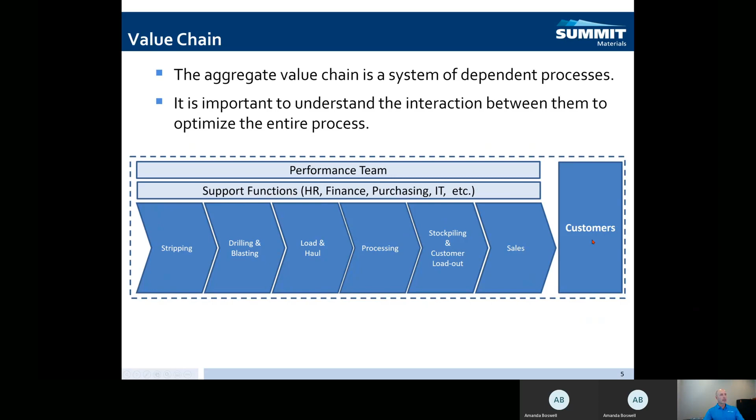Let's talk about a little bit of aggregate trivia. How many tons of crushed stone are produced annually in the U.S.? If you have a pen and paper, I'll give you a couple of seconds to write down your answer, and let's see how close you can get.

There's a little over 1.3 billion tons of crushed stone produced in the U.S. for construction purposes.

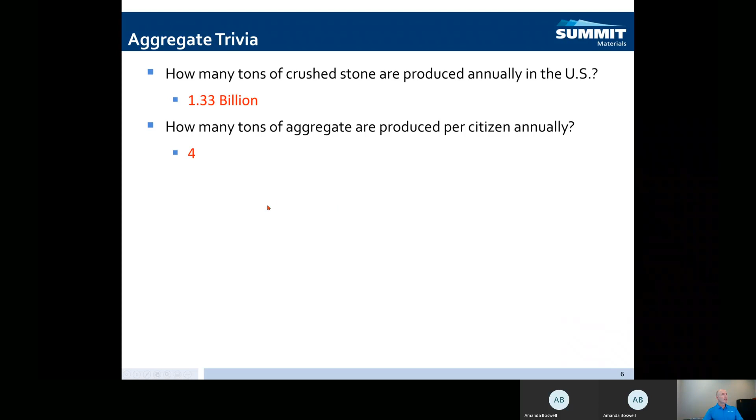How many tons of aggregates are produced per citizen annually? About 4 tons per person every year gets used for roads, houses, sidewalks, and all the things you can think of that aggregate gets used in.

How many tons of aggregates are used per mile of two-lane highway? About 25,000 tons, or about 1,250 truckloads. So when you're driving around and think about all the miles you drive, think about just how much aggregate we really use.

How many tons of aggregate are used to construct the average home? 300. Hopefully you got close on those, but that should give you a little perspective on how important aggregates are to our daily lives.

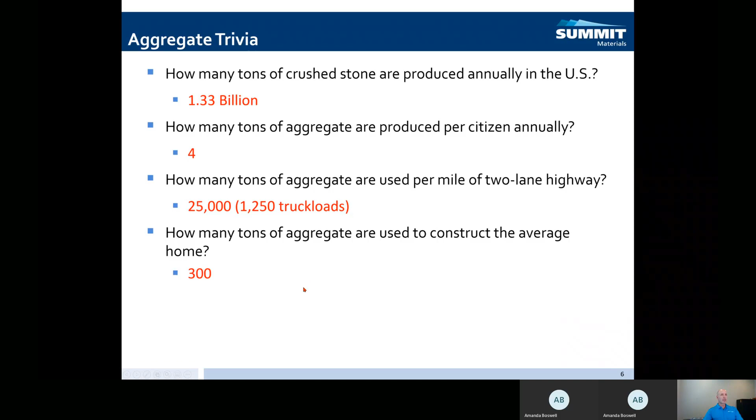Let's move into the aggregate deposits. That's really where everything starts. We want to have good material that we can mine, material we know will produce quality products for our customers.

The definition of a construction aggregate: it's a broad category of coarse to medium grain particulate material used in construction. We call these sand, gravel, crushed stone, or recycled concrete. Those are the major categories.

Aggregates are the most mined materials in the world. There are different types of deposits or geology that we use, but the three main categories are limestone, granite, and sand and gravel. In the industry, we talk about quarries and sand and gravel deposits. Quarries are really just hard rock deposits that have to be blasted.

Sand and gravel, or the technical word for that is alluvial, are areas where material has been deposited. In quarries we have to blast it, but in sand and gravel we will excavate it, which we call dry mining, with an excavator and trucks, or we'll dredge it, and we'll show you a dredge in a little while.

If you think about this piece of pie, the different categories, limestone is the most predominant at 70%, granite's about 13%, and then we've got some smaller types of deposits down here.

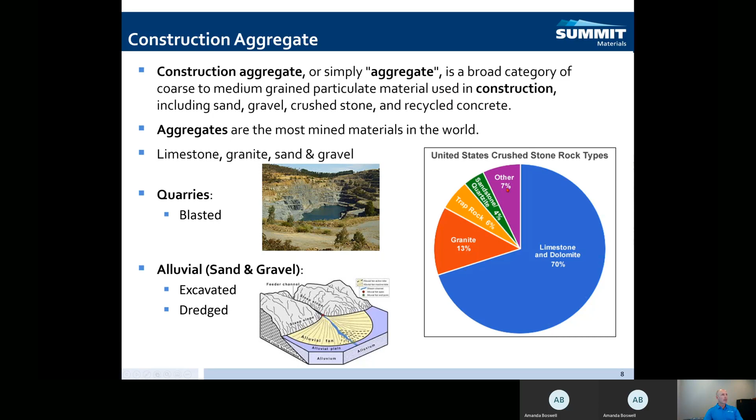All right, let's talk about sand and gravel. Again, they're alluvial deposits, old riverbeds, floodplains, and coastal plain. The main distinction is that these deposits generally do not need to be blasted, and we just dig material straight out of the ground. It's more loose in nature.

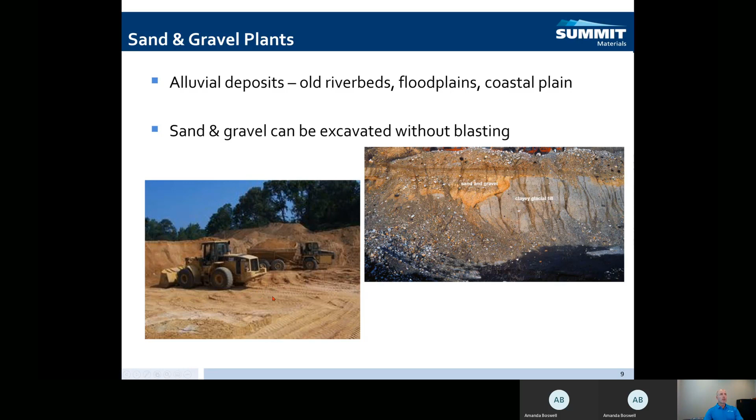The next category for quarries is limestone, which is calcium carbonate. It's a hard sedimentary rock, and it's the most common, as we saw on the pie chart. It can also be mined for chemical properties, but that's not something that Summit does.

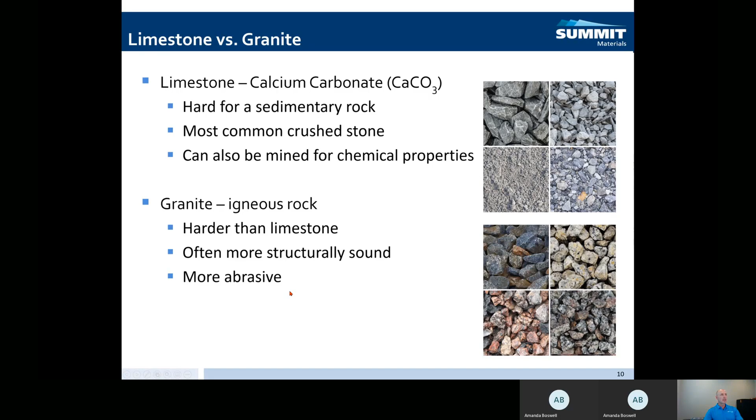Granite is another common type. It's an igneous rock, generally harder, often more structurally sound, and more abrasive. That's a big thing for us in our industry. Granite is very hard on steel, it wears through a lot of steel, so it's a higher cost material to produce.

Let's take a look at where we might find some of these different types of deposits in the United States. This might be a little tough to read, but as you can see, limestone are the pink areas, very heavy in the Midwest, Texas, Florida, and a little bit out in the West. Granite you can see in the mountainous zones, very predominant in the Appalachian Mountains in the Northeast and some out in the West. Trap rock doesn't have a lot of mines, they're very expensive to produce, and there aren't a lot of big cities in trap rock areas, but there is some of that type of mining.

The other big one is sand and gravel, shown in the yellow areas. As you might expect, we see the yellow sand and gravel along the rivers and around the mountains, where material has been deposited through erosion.

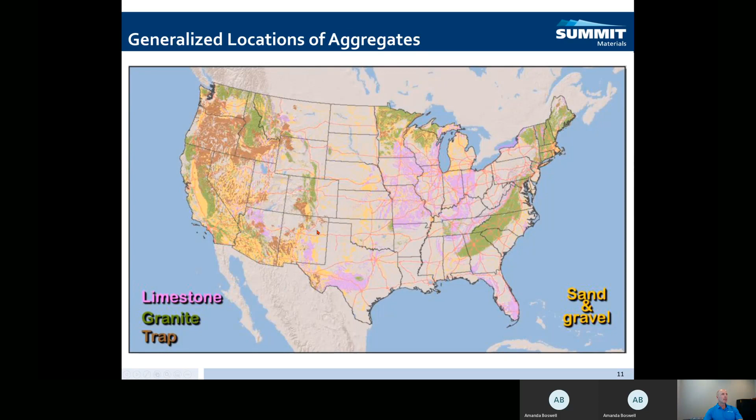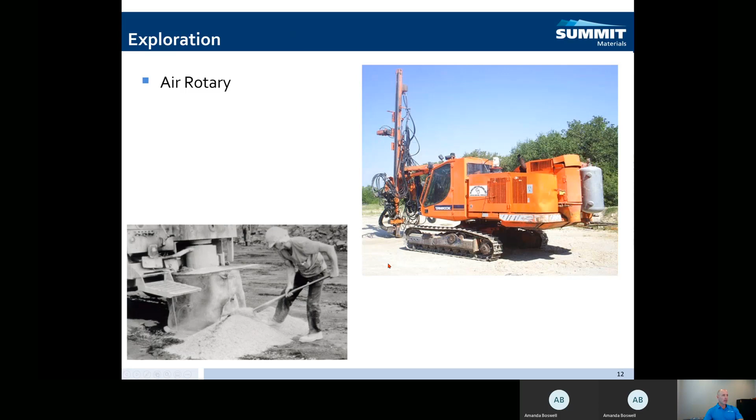So how do we find these deposits? Through a process we call exploration. One type of drill is what we call air rotary. This doesn't give us a lot of detail about what's in the ground, it basically just gives us depths. So a lot of times we'll use this cheaper drilling method to go through the soil and weathered rock to find the top of the hard rock we're looking for.

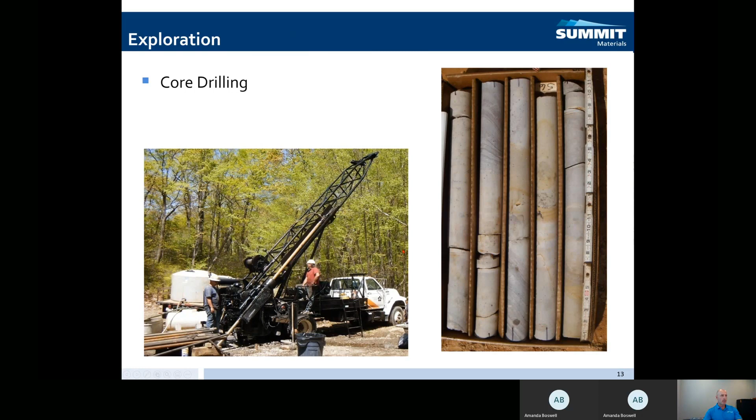The next most common is core drilling. This is a different type where there's a tube with a diamond bit on the head, and it will drill down into the ground and pull out these 2-inch columns that are placed in boxes, so we can really study what's down in the ground. It's a much more expensive way to drill and explore.

Another type for softer ground is auger drilling. Again, it doesn't really give you a lot of detail on what's in the ground. It's mainly just there to tell you the depths of the different types of material.

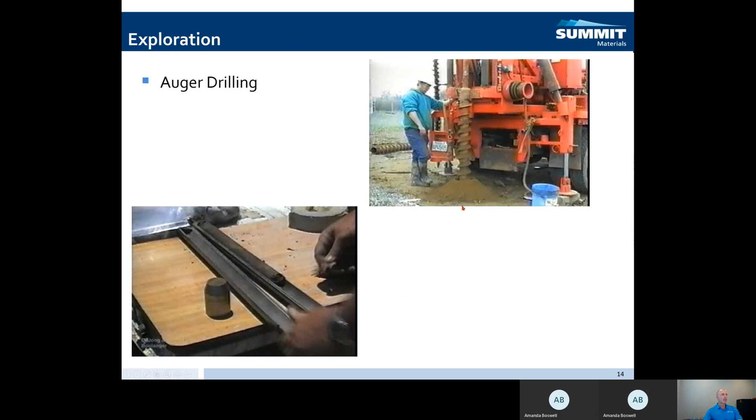Another interesting type of drilling is sonic drilling. This is for loose sand and gravel deposits, and it uses an ultrasonic vibration that allows a tube to be pushed down into the ground, and then the material is pulled back up intact, so we can get a lot more detail about what's in the ground, and it doesn't mix the material together.

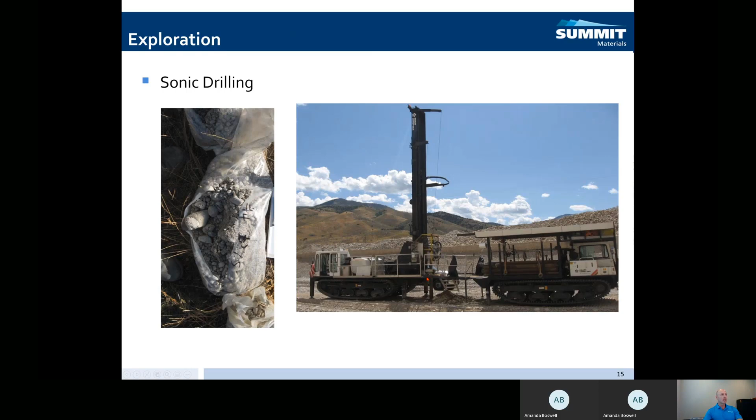Another type that's not real common but used sometimes is called geophysics resistivity. It's a process of placing electrodes in the ground and checking the electrical resistivity of the different types of materials. It doesn't give us a lot of precision, but since drilling is really expensive, this is a way to check for any big anomalies that might have been missed, and then we might want to go back and put another hole based on what we find with this electrical resistivity.

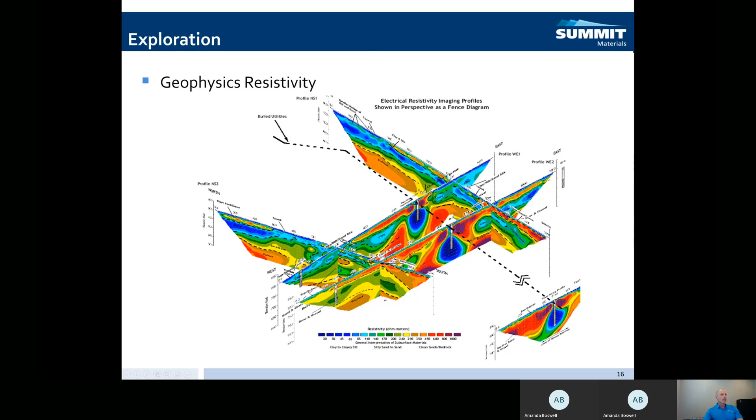Another thing to look for in quarries are ponds. We have ponds that collect water that we use to wash the stone, and we need ponds to collect the water that has fines in it that needs to settle out before we can reuse or discharge that water.

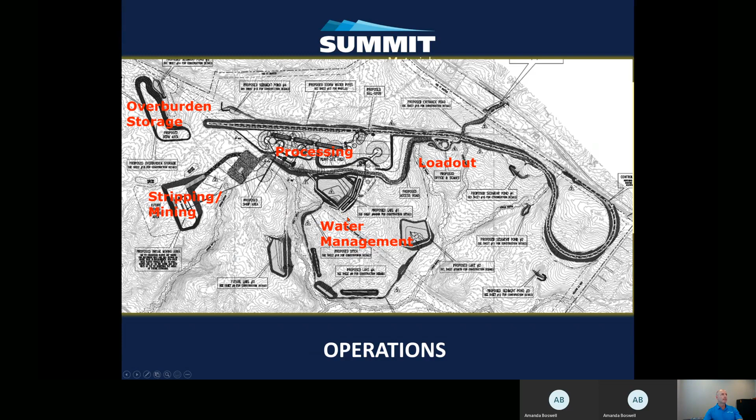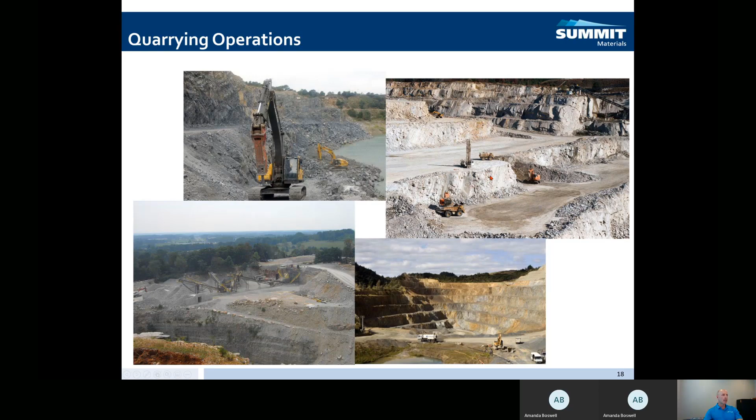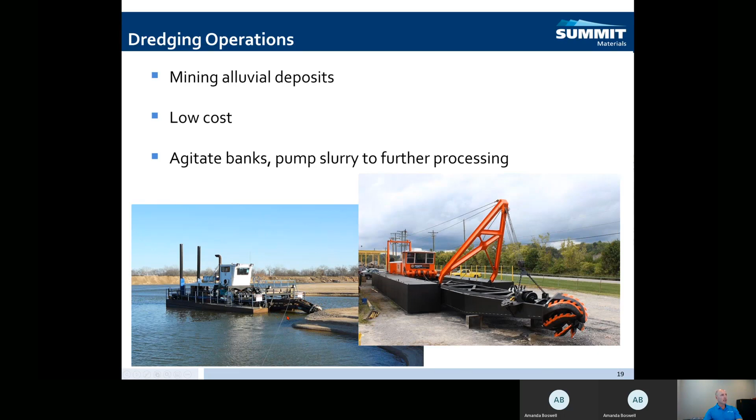Sorry, let me stop this for a second. We've got a little video here that kind of shows you how a dredge will work.

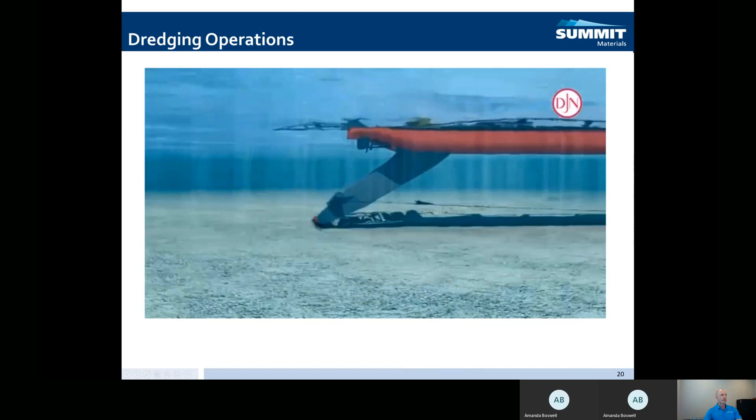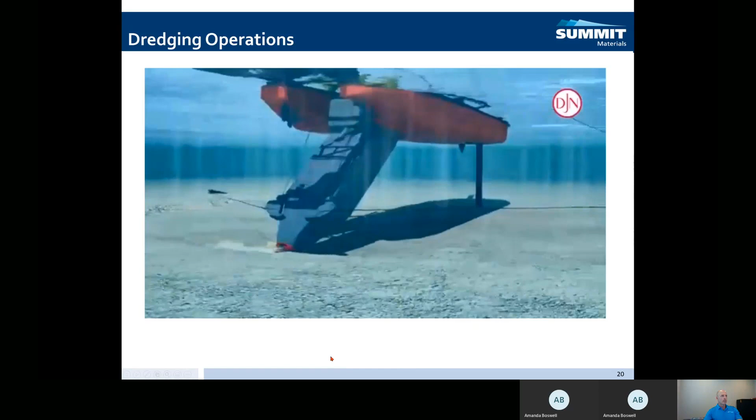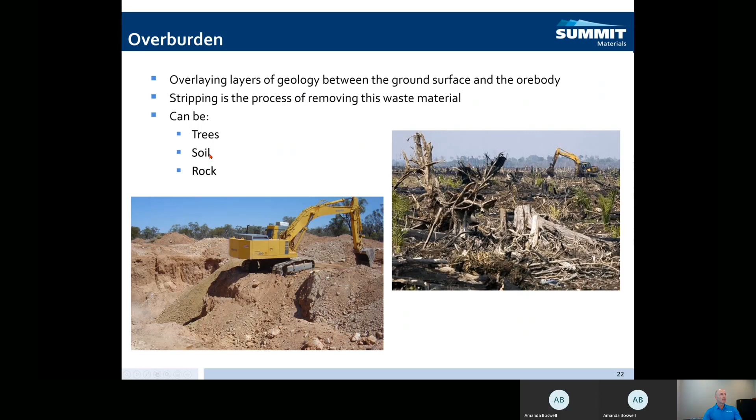So now talking about quarries, like we talked about before, the first step is stripping. Some photos here. Really what we're doing is just taking off the overlying layers of geology between the ground surface and the ore body. The materials that are moved are the trees, the soil, and the rock.

The next step, as we talked about, is drilling and blasting. So the holes are drilled in a set pattern based on the characteristics of the geology and the desired fragmentation. Something that is not obvious is that it's extremely important that these holes are the right diameter, they're put in the right place, and they're drilled at the right angle.

If you think about the amount of explosives relative to the size of stone that's being blasted, it's really small. This hole might be 5 inches in diameter, and the block of stone that it's blasting might be 12 foot by 12 foot. So you think about a 5-inch column that's got to blast a column of rock that's the size of your bedroom, that's 50 feet tall.

If we don't get that explosive in the right place, we're going to get a lot of boulders and things that we don't want, that we can't send to the processing plant. So each one of these holes are hopefully put in the right place, and then explosives are put into those, and we'll get nice fragmentation. We'll talk about this a little bit more in the next coming slides.

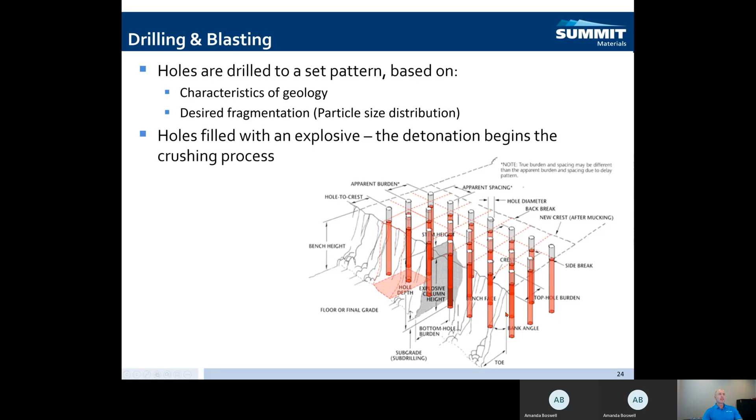All right, so within the blasting process, some of the equipment that's used are what we call a blasting cap and a line, and there's delays between each one of those holes. If we go back up a couple of slides, not all of these holes detonate at the same time. They all go off individually, and this allows for some movement and proper breakage of the stone. If we were to set off all these holes at one time, we would have some upset neighbors.

So the way this works, there's a first initiation with this cap. The cap sets off this booster, and then that booster is going to detonate the bulk explosive that's poured into the hole.

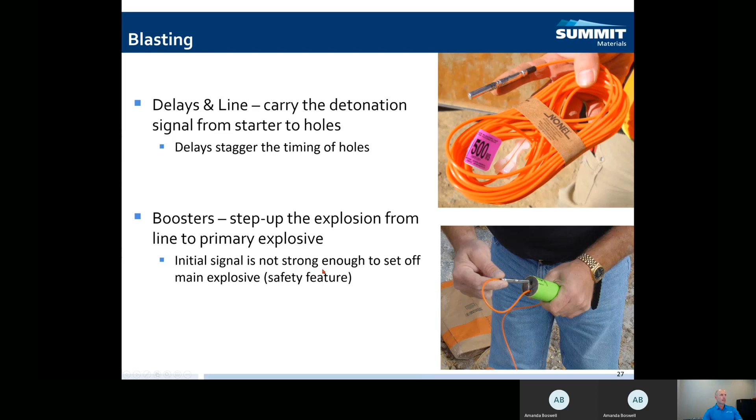So the primary explosive, the material that I talked about that gets poured into the hole, is a fuel and an oxidizer. Most commonly, it's ammonium nitrate and fuel oil. And as I talked about, it's important to have the holes in the right place. There's a couple of different pattern types we'll talk about here: one is a square pattern, and one is a staggered or a chevron pattern.

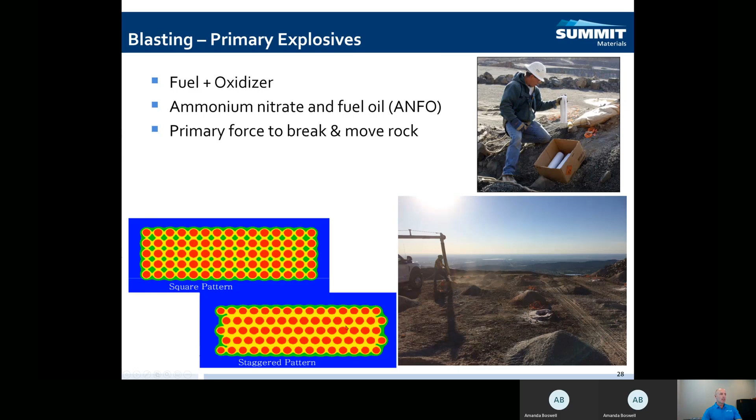Sorry, I'll stop this for a second. Here's some more videos to kind of give you a sense of what a blast might look like.

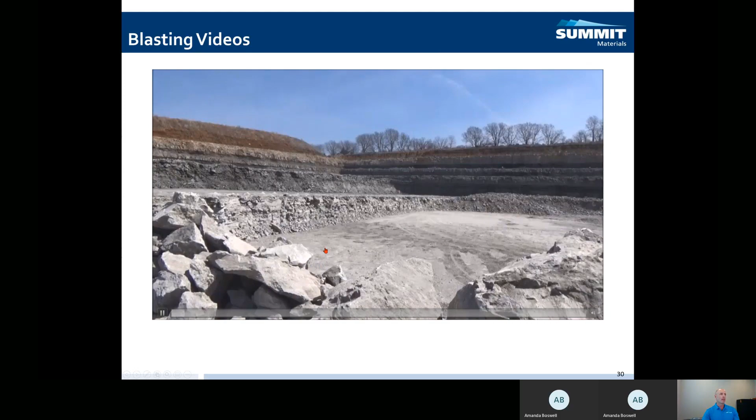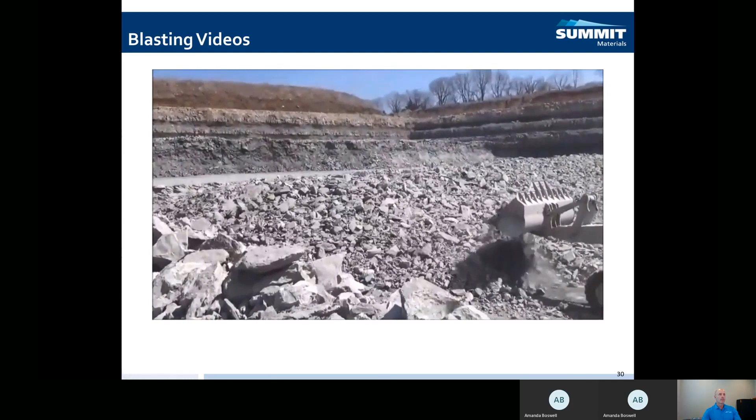Got a couple more here.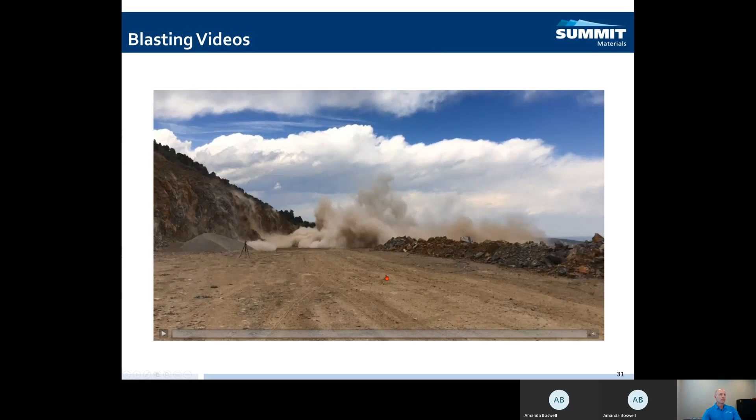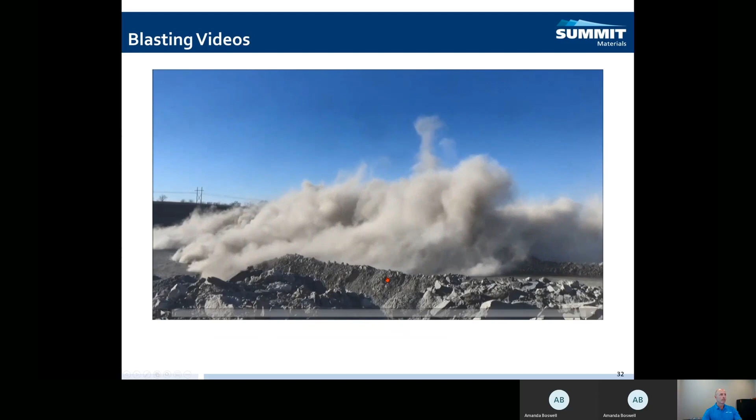Okay, so now we've got some blasted material. Now we've got to load and haul it to the processing plant. So two of the main types of loaders that we use, the first one is a hydraulic excavator. We use this in development areas. You can see in this photo, it's an area that looks like we're moving into a new area. It's used for tougher digging.

You think about this little excavator bucket, it's really got a lot of force, and it's pretty small, so it can really pry out some tough material. So good digging force. It's got really fast cycle times, but it needs support equipment. You think about this machine on tracks and this small bucket, it's not going to do a very good job of cleaning up a large area in a short amount of time.

So the more common that we use for main production is the wheel loader. As you can see, it's very mobile, very versatile, provides a lot of efficiency, so it gives us lowest cost for the bulk of the material that we want to move, and it's very long lasting. So if you think about this thing on wheels, it can move around very quickly. It's got this big bucket. It can clean up some materials, and it's very productive.

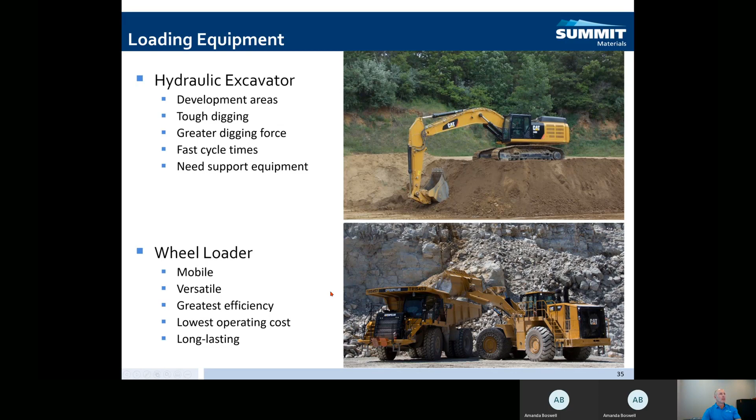So next, we're going to talk about the hauling equipment. Two main types of hauling equipment: rigid frame trucks and articulated trucks. This is a rigid frame truck, very common for most production. Low cost, high capacity, very durable. The next type is articulated, which is more versatile, and it's used for development areas.

And if you think about this thing, the bed is separate from the cab, and it articulates, and then it's got more wheels, and really this allows us to drive in muddier areas where we're moving through material quickly and we're not building permanent roads. So they're higher cost, but they really provide us a lot more flexibility in the right conditions.

So if the material is small enough, we're going to move it with conveyors versus a truck. It's very low cost for transport. It operates continuously. We avoid traffic issues, but again, it requires a smaller size, so this occurs after we blasted the material.

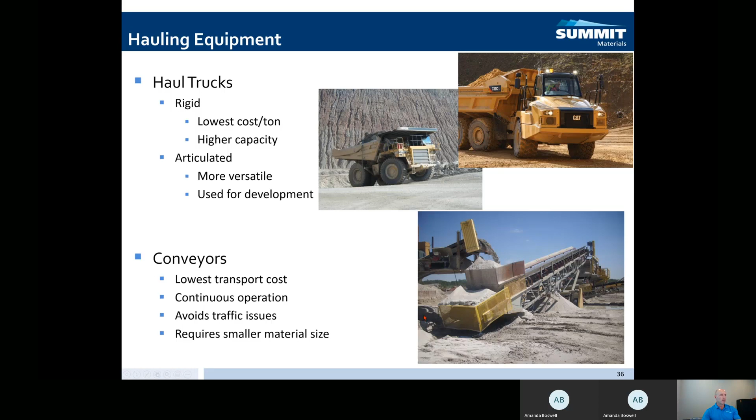Let's talk about haul roads for the trucks. A lot of times we might not make the roads wide enough, and trucks have to wait on each other to pass, but what we're looking for is 2 times the width of the truck for each lane, which is going to be 4 times the width of the truck for the roads. We're looking for consistent grades with smooth turns. That's so that the trucks are not shifting gears a lot, which creates inefficiency.

A lot of times you'll see along the roads there are berms, and this is a safety feature. It needs to be at least mid-axle of the largest vehicle that travels on the road. And then we want a hard compacted surface. If you think about a soft road, it's just going to slow the equipment down and burn a lot more fuel.

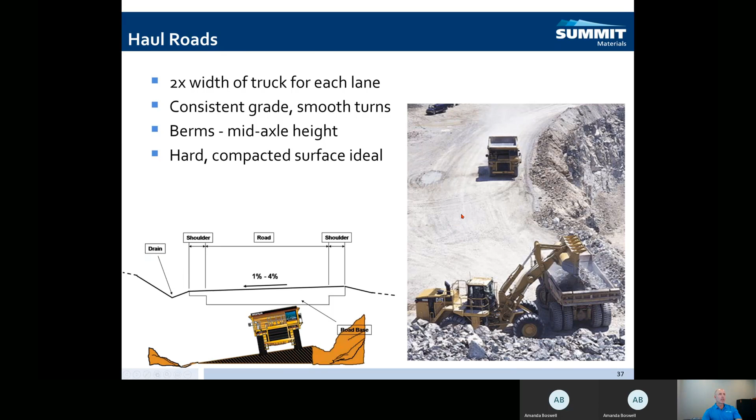So next, once we've hauled the material from the blast to the beginning of the processing plant, we're going to dump the trucks into a big dump box into the primary crusher. And we'll see a little video here.

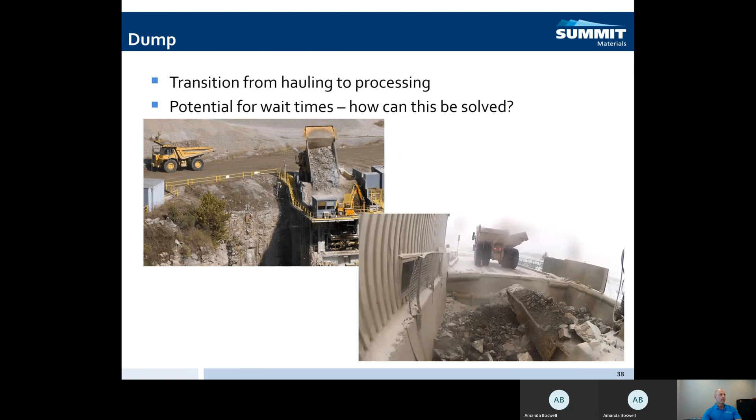All right, so let's talk about the processing part of the process. This looks a little bit complicated, but this is a plant flow analysis, and we use this to study what's going to happen within the plant. It's essentially a series of crushing and screening to get the desired sizes of stone that we're looking for.

Some of the terminology we should go through: the different stages of the process are primary, secondary, and tertiary. Essentially, it's just a fancy way of saying first, second, and third. Some of the products that we make are base products, coarse aggregate, fine aggregate, screenings, and sand. Different crushing types that you'll hear in the industry: gyratory, jaw, cone, HSI, and VSI. And I've got some pictures of those coming up, so they'll make more sense in a minute.

And then different screen types: incline, horizontal, and then just some of the other words that you'll hear used when we talk about the plant flow analysis, are bottlenecks. And essentially what that means, each one of these pieces of equipment, or we call them units, has a maximum capacity. And if you think about the material flowing through the plant, one of these units is going to be at its capacity faster than the other units.

And we can't overload one piece or we'll have problems. So what we try to do is find reasonable ways to increase the capacity of one of these units so that it will allow more throughput through the entire process. And that's what we mean by bottleneck.

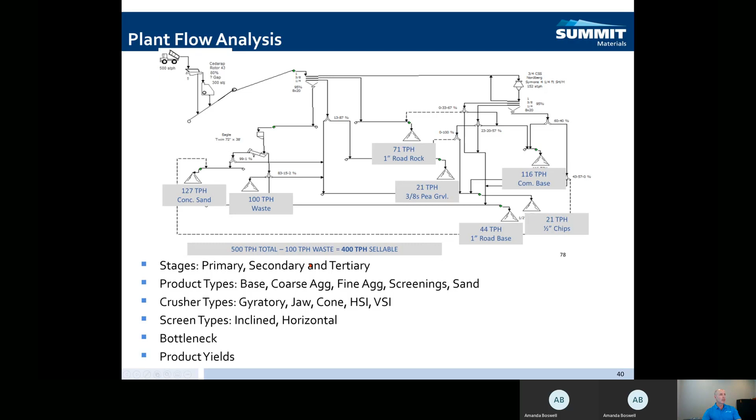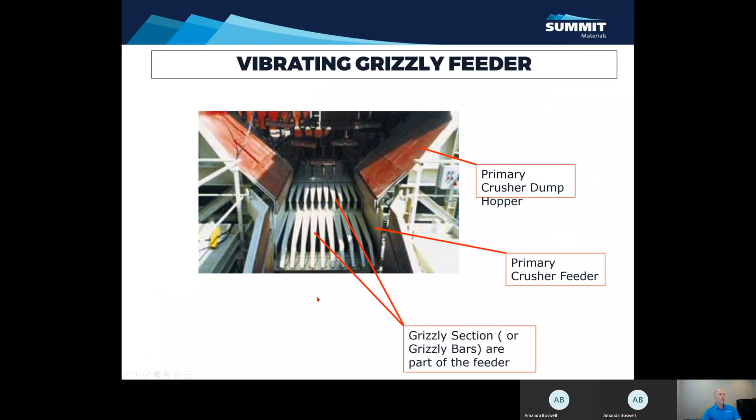All right, you saw earlier where we dumped the truck into a box. And once that material comes out of the box, it goes across a grizzly screen. And that's these bars here that we call grizzlies, and allows the finer material to drop down and bypass the crusher. And the purpose of that is if product is already crushed down to the size that we're looking for, there's no need to send it through the crusher.

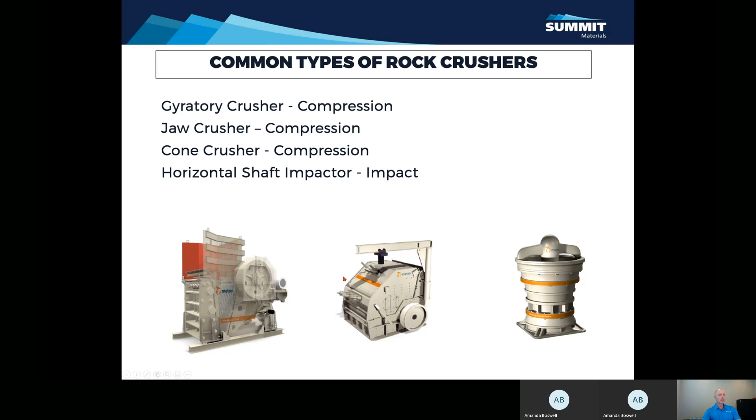All right, we talked about earlier the different types of crushers. We've got a gyratory, jaw, and cone, and a horizontal shaft impactor. Here's some pictures, but I got some better pictures on the next slides. So the first stage of crushing, primary. It prepares the material for transport. It's smaller and easier to handle. Again, here are the 3 types we talked about.

And here's an internal look at the two different types of crusher that we use primarily. Here's an impact crusher. It's a big rotor here with bars on it, and this thing spins at a very high rate, and it throws the rock into these aprons up here, and it shatters the rock, and then it comes back down through here.

Another common type is jaw crushers, where the larger material comes in here. This side of the jaw crusher rotates up and down, and it slowly just crushes the material down into smaller sizes, and it falls out the bottom.

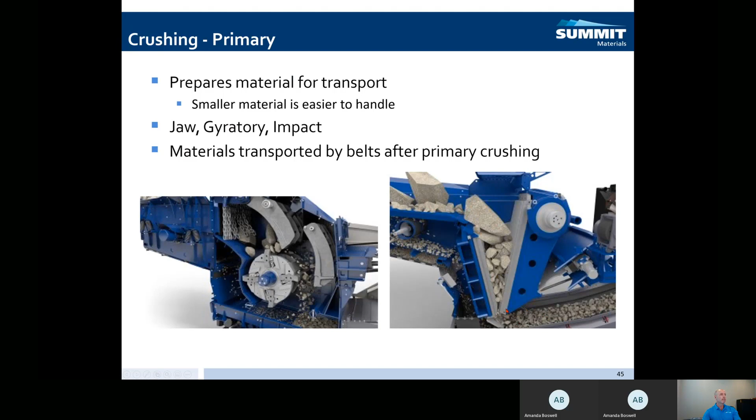Gyratory crushers. These are really large crushers. I think we only have one of these within Summit. So not real common, but for larger mines, use them for hard or soft rock, abrasive or non-abrasive. So very versatile, very large crushers.

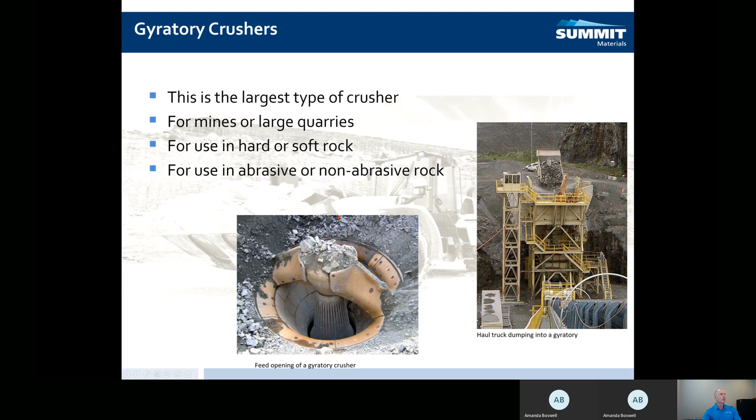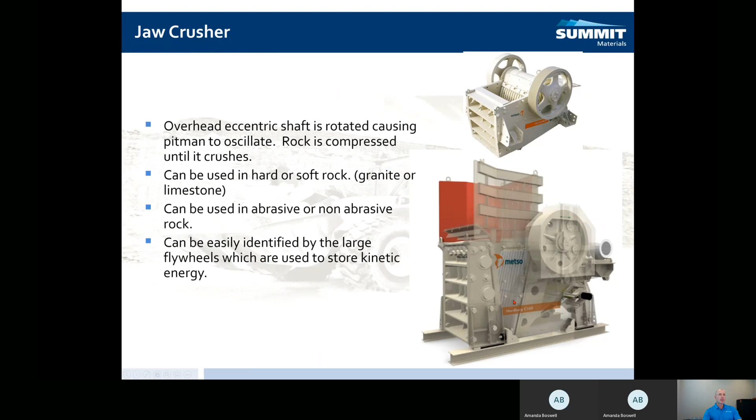All right, let's get back to jaw crushers. We have what we call an overhead eccentric shaft. This big flywheel rotates, and it causes this one side of the jaw to rotate up and down, and it just pulls the rock in and it crushes it down. Again, it's easily identifiable by the big flywheels.

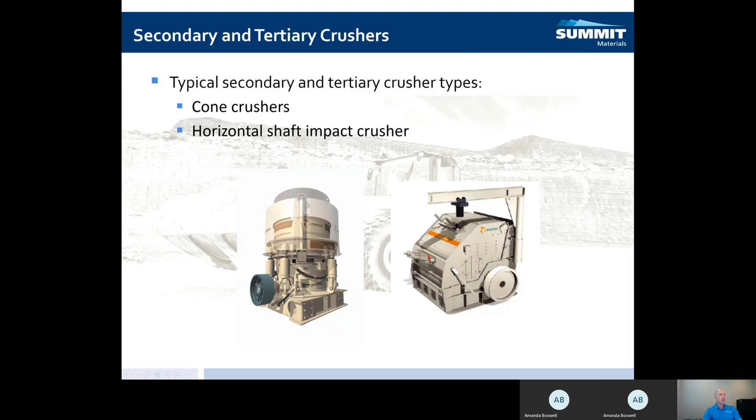So the next, or secondary and tertiary stages, the more common crushers are cone crushers, and I'll show you what one of these looks like on the inside in a moment. And then we've got the horizontal shaft impactors. They're a lot like the ones we just looked at for the primary crushing, but they're just smaller.

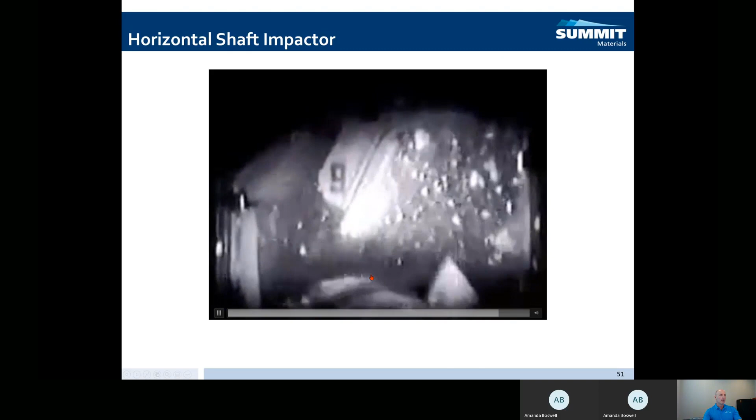So here's a video of the inside of a crusher, a horizontal shaft impact crusher. And I think this video was taken back in the 50s. It's old. So that kind of gives you an idea of what happens inside these crushers.

We talked about before the cone crushers. A different type of crushing happens here. The material flows down into the top, and then this mantle looks like a big bell. It's attached to the shaft, and this shaft spins, but it kind of oscillates. So this thing oscillates around in a circle, and the material is just slowly pulled and crushed as it falls down through the chamber.

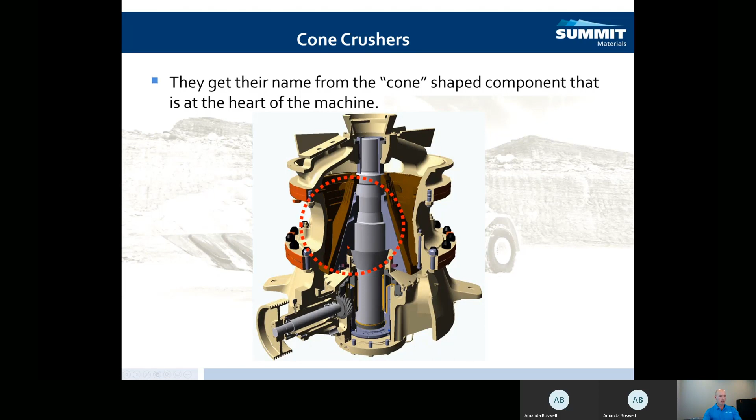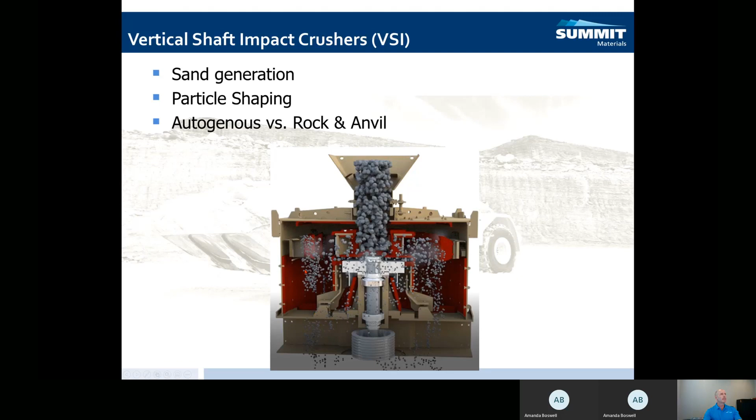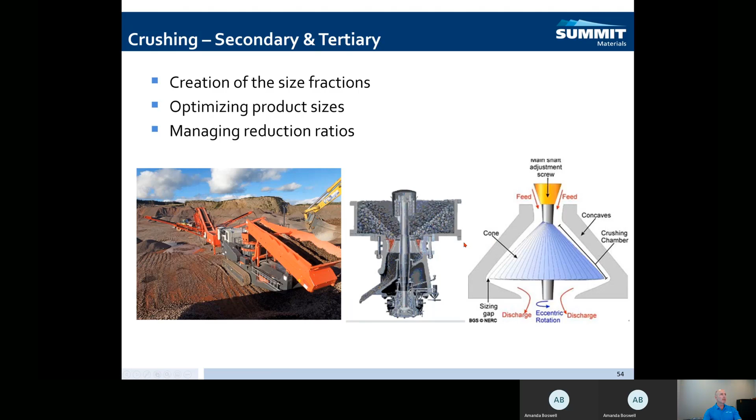Something that's very important to us is keep the right bed depth. If this material gets too thick, then pieces that we want to fall through the screen don't have an opportunity to find their way down through that thickness of material, and we'll get that material carrying over and getting into products that we don't want.